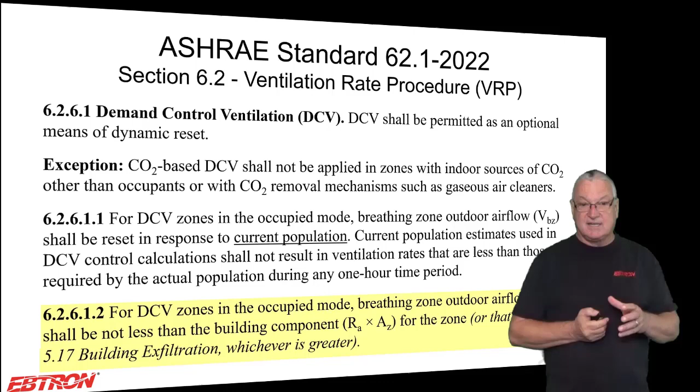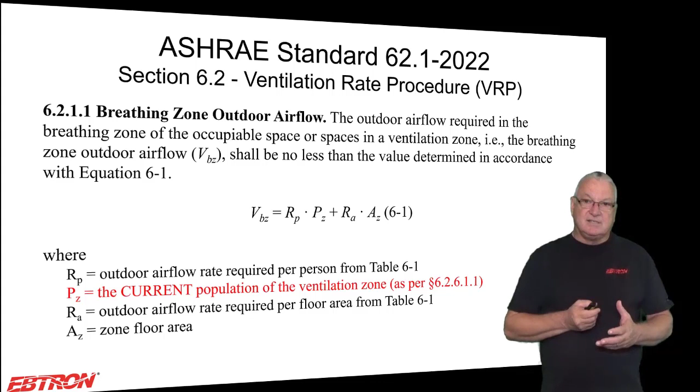The addendum AB maybe changed some of the numbering a little bit here, but it hasn't really changed this concept. So when you take a look at this, if we want to know if we're in compliance, we're going to look at the breathing zone outdoor air. We're not going to do it based on the number of people in the ventilation zone during typical usage - let's take that out. We're going to look at it based on the current population of the ventilation zone, based on the definition that we just went through. So it kind of turns Standard 62 into an operational standard.

So the question is, what in the world does CO2 have to do with this? And what is CO2? How does CO2 relate to indoor air quality? Because I've been doing this for a long time - I've been focusing on CO2 and outdoor airflow rates since the early 1990s. It basically was, for me, I saw two populations of people: those who think it's all about outdoor airflow rates, and another group who think it's all about CO2 levels.

So let's go into this. Why do I maintain CO2 levels? And I think this - like I said, I've been doing this presentation now for almost 30 years, very similarly to what I'm going to do today.

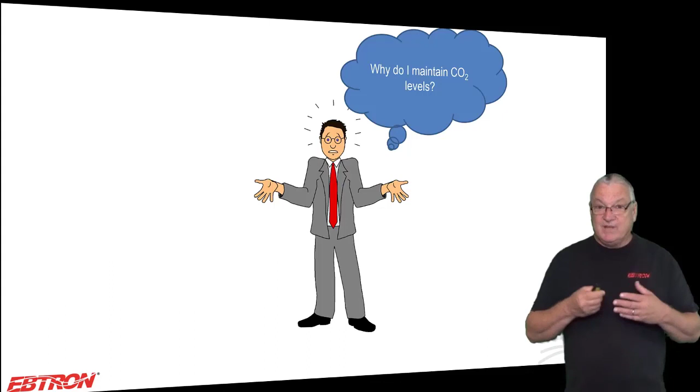I think that over the years, more and more people are getting on board and understanding this, but I still run into way too many people that don't. So I'm going to keep doing this until we get everybody on board, okay? So why am I doing this, okay?

Well, first of all, we're not doing it because it's a contaminant, and we're not doing it because it's a direct measure of indoor air quality. That's one of the first misconceptions that I see.

In fact, if you look at CO2 as a contaminant, OSHA doesn't consider it a contaminant until it exceeds 5,000 parts per million over an 8-hour period, and in shorter periods even higher levels, like 10,000 parts per million over a 1-hour period, is where it becomes a problem. That's not where your buildings are. Your buildings are running anywhere from ambient outdoor CO2 levels of 400 parts per million to maybe on the high level 2,000 to 2,500 parts per million. So it's not a contaminant.

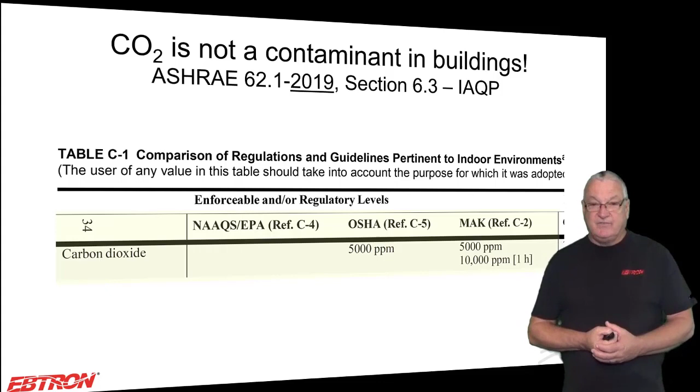So what is it? Why are we doing this? The way that the industry has looked at this, and this is not correct, is they said, let's assume that we're at steady state. Steady state just means that nothing's changing, meaning the outdoor airflow rate coming into the space is not changing, the occupancy is not changing, and their breathing rate is not changing, okay? Their CO2 generation rate is not changing.

And we all know that when we're doing DCV, we're doing it because the population is changing, all right? Nonetheless, this is how the industry has looked at it. If you really want to look at this properly, which we're going to do at the end of this segment, we're going to look at how the rate of change, and the fact that we're not at steady state, really affects how much ventilation we're getting.

Okay, but we're going to do this like the rest of the world looks at it right now. We're going to look at it at steady state, and I've read a lot of papers and seen a lot of things where people have used a steady state assumption improperly, particularly on multi-zone recirculating systems. I'm not going to go into that today.

But when you do a steady state analysis, the volume of the space no longer matters and the rate of change no longer matters. And to make a steady state equation, it's pretty easy: the goes-intos have to equal the goes-outos.

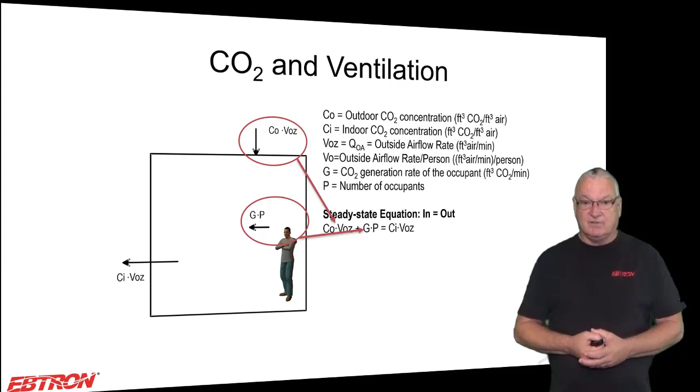Another goes-into, which is dimensionally the same, is G times P. In this case, G is the CO2 generation rate of the occupant in cubic feet of CO2 per minute, and P is the number of occupants. We produce CO2 as a byproduct of respiration. The more of us there are in the room, the more CO2 is going to go into the room. So there are two goes-intos.

Now we only have one goes-out-of, and that's the same amount of outdoor air that has come in, either forced exfiltrated, mechanically relieved, or mechanically exhausted. So VOZ is going to be the same, but now it's going out of that ventilation zone at the new elevated indoor CO2 level, or what you would theoretically measure in the ventilation zone, so CI. So now you have an equation, and we can rearrange it algebraically and still have an equation. One of the things we can rearrange it for is VOZ over P.

Which, in IP units, is outside air CFM per person. So it's like, oh, got it now. I hope you got it now. You're not measuring CO2 because it's a contaminant or a measure of air quality. It's simply a proxy for outdoor air CFM per person entering that ventilation zone, and there is value to that.

As long as we know the CO2 production rate of the occupants, G, and the difference between indoor and outdoor CO2 levels, we can estimate how much outdoor air CFM per person is coming into the space. Graphically, we can say that blue line, which corresponds to the right vertical axis, represents steady state maintaining 1,000 parts per million. For a given population on the horizontal axis, we can estimate how much outdoor air is actually coming into that ventilation zone.

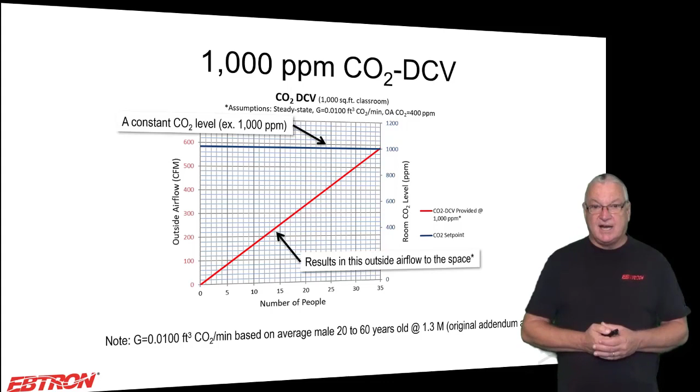That red line is the theoretical outdoor air coming into the ventilation zone, associated with the left vertical axis. I know when you look at these graphs sometimes it's hard to see, but that's why I give you a presentation to look at, or follow along now. These are all based on CO2 production rates of the occupant, and also being at steady state.

Now the first problem we have, which has been a problem since 2004: in 2004, Standard 62 changed the way you calculate ventilation rates from a simple CFM per person to CFM per person plus CFM per square foot. Over the years I've heard people say, I do CO2 DCV because it complies with Standard 62. It really hasn't. Single set point, which is what most people are doing—hey, I keep 1,000 parts per million in a space—single set point DCV does not comply with Standard 62.

It overventilates on the high populations. In this case, I'm using a school classroom, a 1,000 square foot classroom, and it'll overventilate on the high end and underventilate on the low end. Technically, overventilating is in compliance with Standard 62, but I don't believe that was your intent.

I like using this slide quite a bit for those of you that do fixed set points, 1,000 parts per million control—you have some real design problems here. Because unless you're in California operating under Title 24, which is a little different in the ventilation rate required, just about everywhere else in the country is using ASHRAE 62 ventilation rate procedure, or the IAQ procedure ventilation rates, which are even lower.

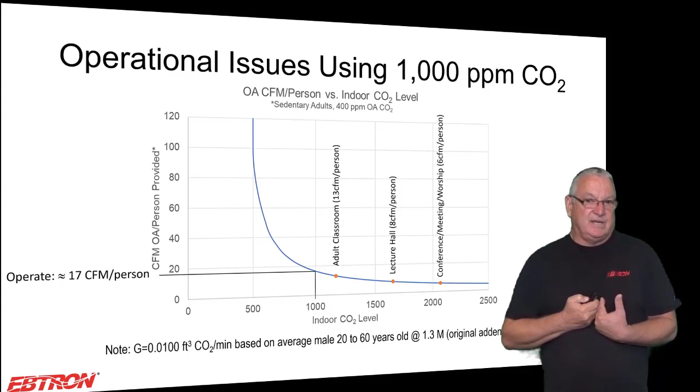I've been talking about this for years. The people that I get in front of and talk to finally understand some of their operational problems. And this is one of the reasons why Standard 62 is trying to make some changes through their addendum AB. I don't think they did a great job, but I think they had to do something, okay? And that's just my opinion about them not doing a great job. I think there's a bunch of errors that I'm going to try to point out a little bit later.

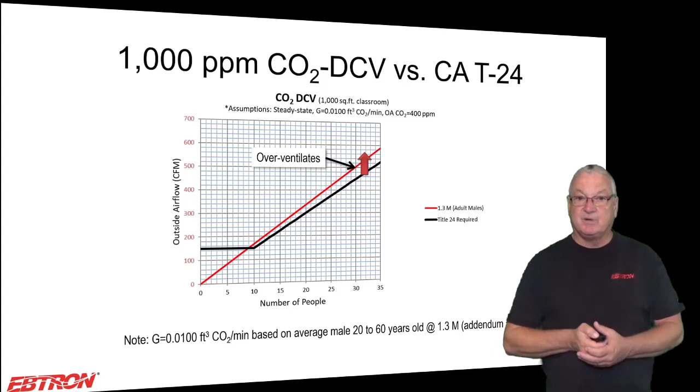Those of you in California, you're a little bit closer because California's 15 CFM per person requirement is closer to the 17 CFM per person. In this case, you're really not in as bad a shape, okay?

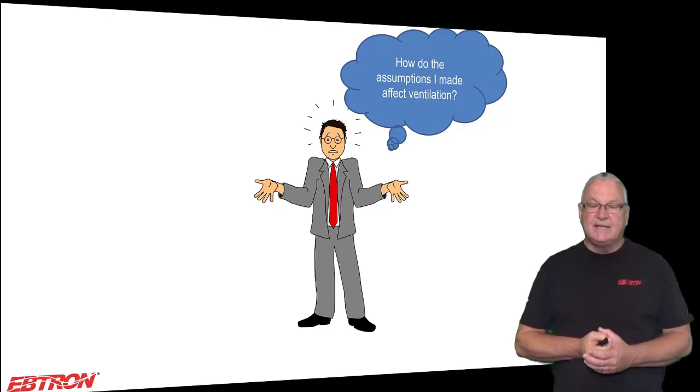The problem now is about assumptions. You've made assumptions, and how do these assumptions affect ventilation? I was really happy about 5 years ago because there was an appendix in Standard 62, Appendix D, and I thought it was misleading, and it got removed, and they came out with this original addendum AB, which said, hey, there's a lot of things that affect the CO2 production rate, which essentially affect how much outdoor air is coming in, and you need to make corrections for it. And the original addendum AB was great.

It was said, hey, make these corrections, determine your set point, and that's how you're going to move forward with this. Well, over the years, the first AB did not get approved, and the second AB didn't get approved either. Finally, this third AB that did get approved really is a really bare bones version of this. But I want to just show you this because you may or may not realize it, okay?

The CO2 production rate of an individual is based on a lot of different things. It's based on their age, their sex - are they male or female - their diet, are they high fat or low fat, their body mass, and their activity level. What I'm doing here is holding all males, same diet, using the average body mass for that age group, and keeping the activity level the same at 1.3 MET. There's folks that say, well, the younger people are more active. You can say that, but I've been in classrooms where the 5-year-olds are napping, so I don't know that I necessarily agree with you.

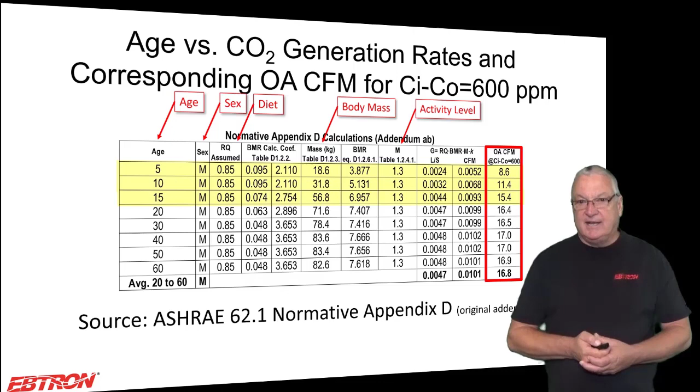The 20 to 60-year-old males, there's not a whole lot of variability here, 16.4 to 17 CFM per person, the average being 16.8. I don't think that's a big deal. But when you look at the 5-year-old, it's 8.6 CFM per person. And then it gets a little bit better. Graphically, I think it's better to look at it this way.

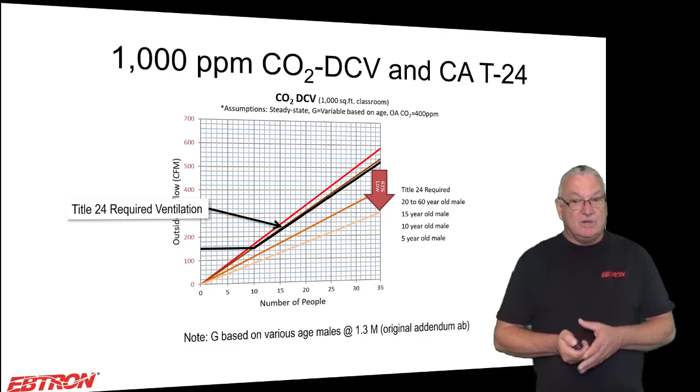So at any rate, you have this problem that has to do with the CO2 production rate just based on age. And actually in California, the Title 24 folks, it's actually worse. The underventilation is worse because your ventilation requirements are actually a little bit higher. So it doesn't matter where you are, this is a problem.

So calisthenics, vigorous effort, 8 MET. You may say, well, I want more outdoor air, but I don't think you wanted this much more outdoor air. Because when you look at this relationship, you find that the MET activity level is directly proportional to the CO2 production rate, which is directly proportional to the outdoor CFM per person. So it's 6 times more.

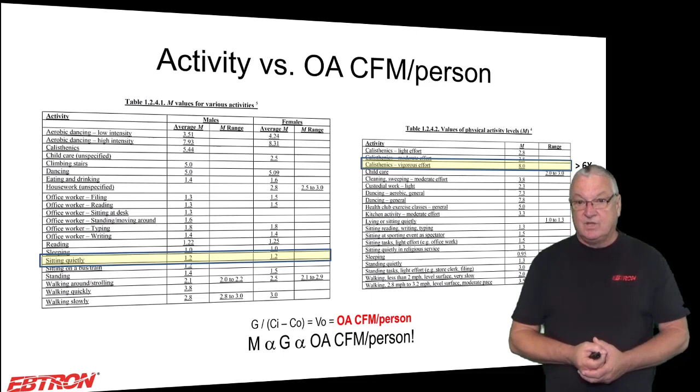And I'm not very good at math anymore because I use my calculator and computer. So I'm going to just say, let's say at 1.2 MET it was 15 CFM per person. At 8 MET, it's basically 6 times that, or 90 CFM per person. You did not design your system for 90 CFM per person.

Sorry. In fact, when you look at activity level and graph it, and I only go to 5 MET here, I used to say to people, you might as well go to Vegas and play one of the games. You have a better chance of winning the game than getting the ventilation right.

And I actually had this graph in a paper with a little different data, but very similar, in a paper I tried to publish in ASHRAE Journal in 2010 or 2011. And they didn't want to publish it because they said I was CO2 bashing, even though it went through peer review and was technically accurate. What do you think about that? Okay, nobody has any agendas in this business.

But anyhow, I would say Dave Dougan, party of one. Yep. Anyhow, that's the way it is, you know. There's a lot of uncertainty here.

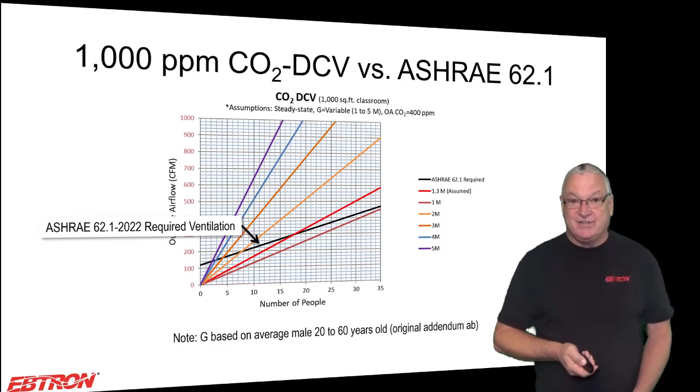Okay, same thing is true with California's Title 24. Then the next thing you got to look at—okay, so I'm isolating uncertainties here. And okay, so now how does CO2 measurement error affect ventilation?

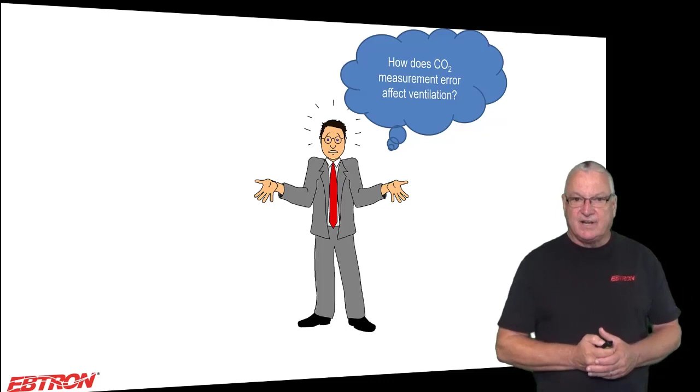Basically, Standard 62 requires that you're within 75 parts per million on the CO2 measurement in the space, and says you can assume 400 parts per million outdoors. Well, I don't have time today to go through all the data, but I have data that shows CO2 levels outdoors anywhere from 350 parts per million to 550 parts per million, depending on the season, depending on what's going on. There could be a thermal inversion. There's a lot of things that affect CO2 levels, time of day in cities based on vehicles. A lot of things affect the outdoor CO2 level.

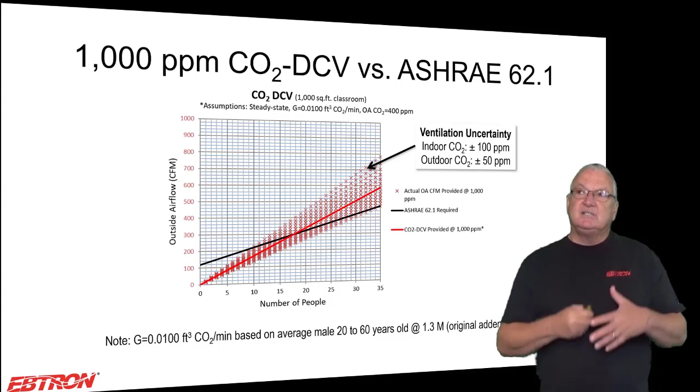Indoor CO2 level—it's not just the measurement error of the sensor, it's the placement of the pickup point. If you come to Ebtron, we have a bring-a-guest room, we call it. It's a 5,000 square foot space. I have 12 CO2 sensors in that space that when they're unoccupied read relatively the same. But operationally, when I put people in that space, those 12 CO2 sensors can read 100 to 200 parts per million different just based on where they're located.

And that has nothing to do with the measurement error of the sensor. So this graph shows the scatter that's basically what happens if you recalculate everything with these errors in your measurement. Where the red line had been your theoretical ideal line, the red scatter is with the 100 part per million uncertainty on the indoor CO2 measurement and 50 part per million outdoor.

And this is if all of your other assumptions are right, meaning that you're at steady state, which you're probably not, and that you actually knew the CO2 production rate of the occupants, which you probably don't. So those are the problems here.

I mean, look at that. The black is what you needed to provide, so that at 35 students, on the far right of that horizontal axis, the black intersecting point is how much outdoor air that you needed to bring in, and the highest point on the scatter is how much outdoor air you may have brought in, or you would be in CO2 alarm, and that's 50% off.

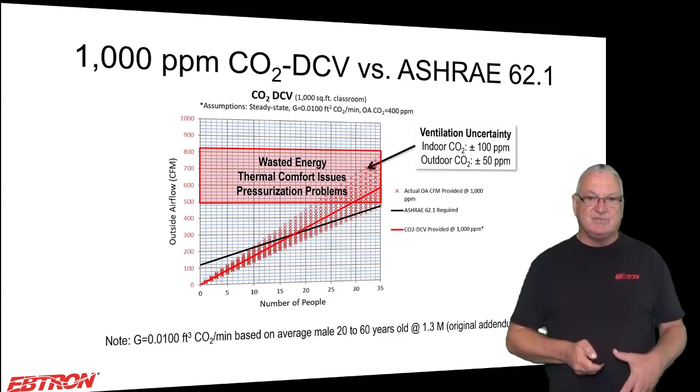Your systems can't handle 50% over ventilation. You might say, oh yeah, that's great, I don't mind the over ventilation. Well, your system can't handle it. It wasn't designed to handle it. So you got wasted energy, thermal comfort issues, pressurization problems, and on the other end you might have IAQ problems or pressurization problems.

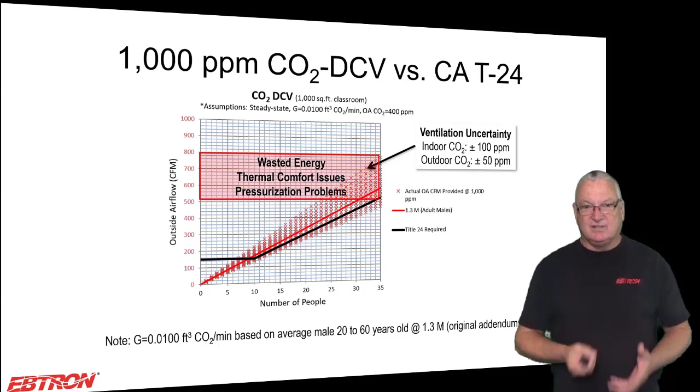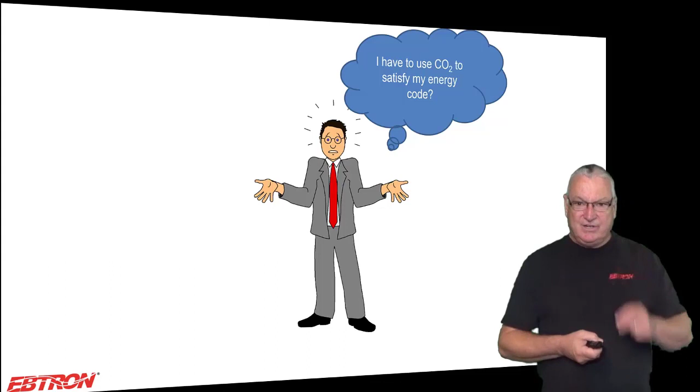So now you say to me, Dave, you've been fighting this for 30 years. I'm not gonna fight this. I have to do this. I have to use CO2. So what are we gonna do here?

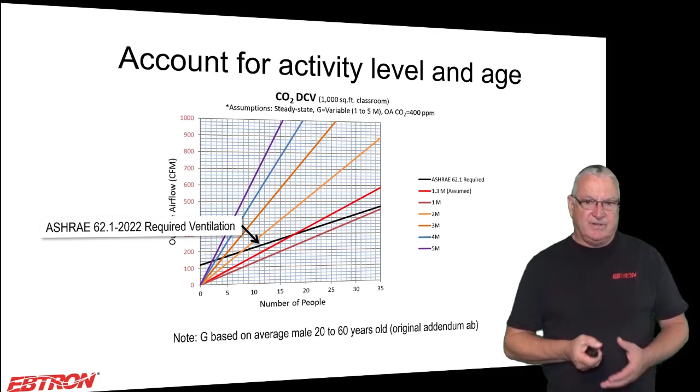The question should be, can I improve it? And the answer is yes, we can improve it. The first thing you need to do is account for activity level and age, and then you need to set some limits. Now, how do you set limits?

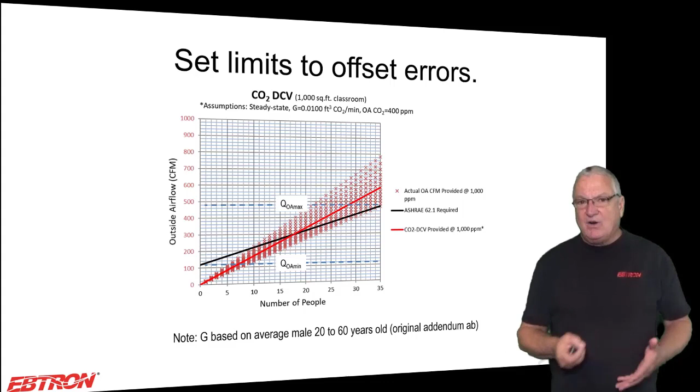Most people set limits with fixed dampers, but we can demonstrate that fixed dampers have problems, whether they're on recirculating air handling units or you're doing DOAS with zone level measurement. You can't rely on a fixed damper position. On recirculating units, basically we have wind pressure and stack pressure that we have to deal with.

We have hysteresis, binding, deterioration of the damper. Those are problems. And then we don't have the wind and stack pressure problem when we talk about DOAS,

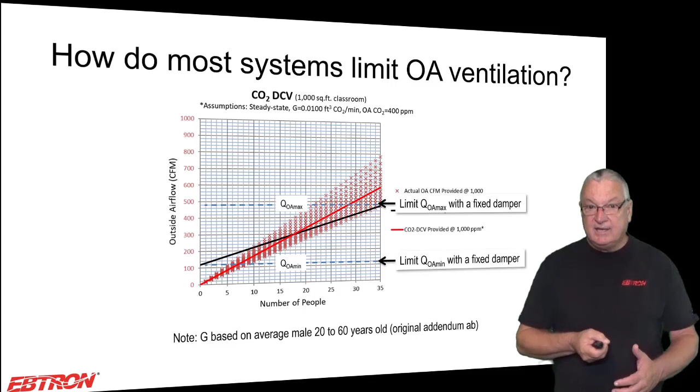but on DOAS, we have different ventilation zones that are changing their ventilation requirements so that a given damper position will result in variability in airflow. So you just can't set fixed damper positions.

So I show all this uncertainty on the damper, it's useless. And I'm not even showing you, like on a rooftop unit or something like that, the fact that there's additional error because test and balance can't even get out there and get a good measurement. And then on top of it, you have this either changing fan speeds or changing damper positions on DOAS.

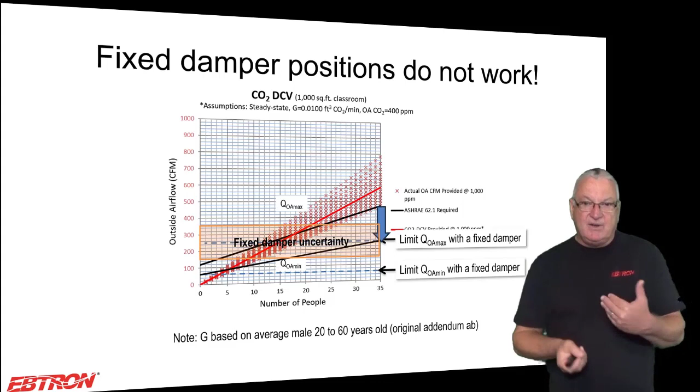So fixed dampers don't work. It's a moving target. You cannot rely on fixed dampers. The way you need to do this is you need to do flow measurement. On recirculating units, it's in the outdoor air intake, and on DOAS, it's at the ventilation zone.

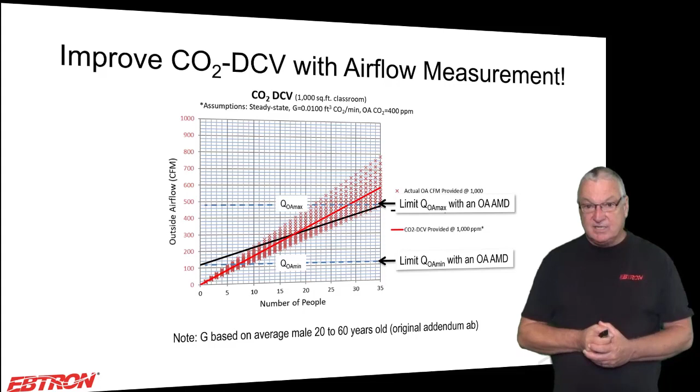A very common way that people would do this is they would do a deadband control where they would set a min-min and a min-max, and they would control at the min-min or the min-max, depending on what the CO2 level in the space is. And if you're doing it with airflow measurement, it's a big improvement. Now, I am going to show you some of the real-time lag problems, but it's a major improvement, and that's what you should really do.

The preferred way that we've had to do it for years, that I think in reality Standard 62.1 AB is finally saying to do, even though they don't explicitly say it. This is what they're saying.

You measure the CO2 level in the space, and you look at your CO2 set point that you're trying to get to or not exceed, and it goes into a control loop or reset loop, and you output a new airflow set point. Then you compare that airflow set point to your min and your max. If it's below your min, you set it to the min. If it's above the max, you set it to the max. If it's anywhere in between, it's anywhere in between.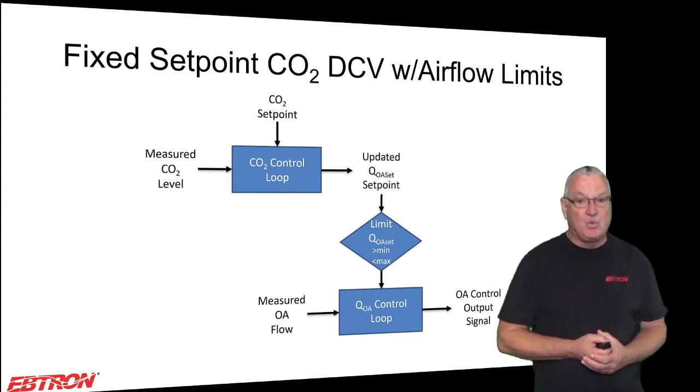And that airflow set point then goes into your outside air control loop, which could be as simple as modulating a damper or a more complex sequence that's required on some air handling units.

And you end up with this within the limits of the airflow measurement error, okay? So this is a significant improvement.

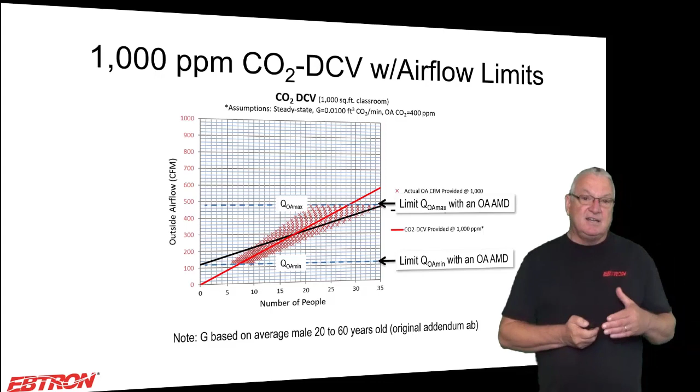And that just brings me to this addendum AB, which, like I said, it's just recently approved. Probably most of you don't even know it's been approved, okay? So a couple things that I want to state about what they're telling you to do now, which is an improvement, but there's some problems that I'm going to explain to you, particularly when we go into actual operating, meaning we're not at steady state, okay?

But at any rate, they say DCV controls to maintain the zone ventilation rate no less than the building component when zone CO2 concentration is at its ambient or low outdoor level, basically. Upon a rise in measured CO2 levels, ventilation shall be increased proportionally. So it's a proportional reset. It's not the perfect way to do it, but it is a better way than that deadband control that I showed you previously, okay?

This statement here is not correct. Because CO2 and ventilation are codependent, this will rarely, if ever, happen. And I am concerned about the language on this. It says, when the zone CO2 concentration is equal to the maximum CO2 concentration, the minimum zone ventilation rate shall be equal to its design ventilation rate. That is not necessarily going to happen. And I'm going to show you that in a few examples.

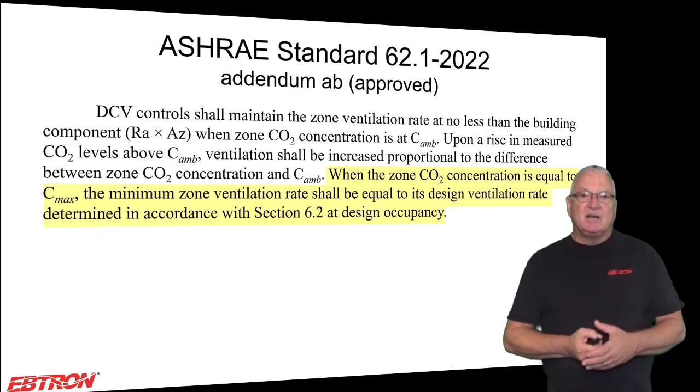Okay, but anyhow, Addendum AB is an improvement, okay? One of the problems I've had getting people to do the method we've wanted to do is that you'll end up with a CO2 level in the space that varies. People weren't ready to do that. Well, now if you follow Addendum AB, that's exactly what will happen. CO2 level in the space will vary.

There's a couple other things that I think are noteworthy here, and it kind of helps with this one problem I'm talking about. Zone and system ventilation rates are not required to be larger than the design ventilation rate required by Section 6.2 at design occupancy, regardless of CO2 concentration. I think the intent here was they knew there's going to be measurement error, but it's also because of this codependence problem, okay?

So you have an airflow measurement device in either your outdoor air intake or at the ventilation zone on DOAS, and then you can basically say, hey, the CO2 level is higher than my set point, but you know what? I can show that I'm at the design maximum. That's great. And I was glad to see this note because I think this was very important.

The CO2 values in Table 6.1, which I'm not showing you, unfortunately give you CO2 default levels which are rarely, if ever, going to be what the correct CO2 level needs to be on a lot of these spaces, okay? And unfortunately, not everybody's going to understand that. They're just going to look at these CO2 levels and set them, okay? The other problem is they allow CO2 to be used on low occupant density spaces, which I'm going to show you is a very, very, very bad idea, okay?

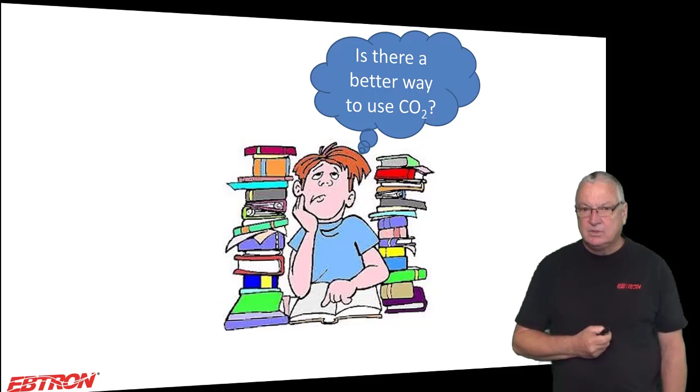So then the next thing comes up: is there a better way to use CO2? Okay, and I think there really is. And this is really how I had wished that Addendum AB would have been written in terms of how you do the control.

Because, you know, Standard 62 rarely tells you how to do something. They don't tell you to measure outdoor airflow rates and control them, but for some reason they're telling you how to do the CO2 DCV, and they're not even telling you necessarily the correct way to do it.

Okay, but when you take a look at the steady state equation, if you're going back and making the assumption of steady state, which again is what everybody's doing, which is wrong, okay, and you are measuring the outdoor airflow rate either at the air handler or to the ventilation zone in DOAS, you actually have one more piece of this pie, and when you have that one more piece, you can estimate the population.

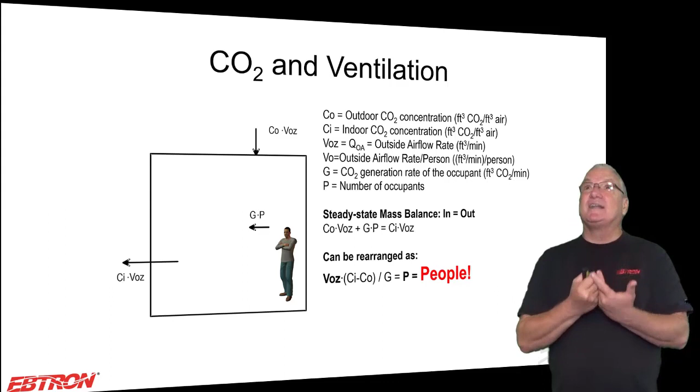And again, we've been saying this. I've been trying to tell people to do this for 15 years. I don't know why nobody listens.

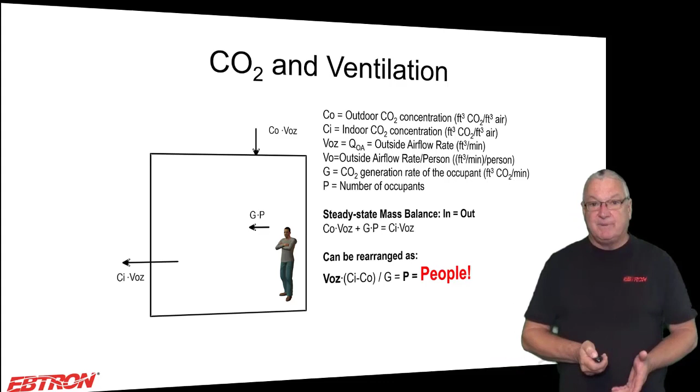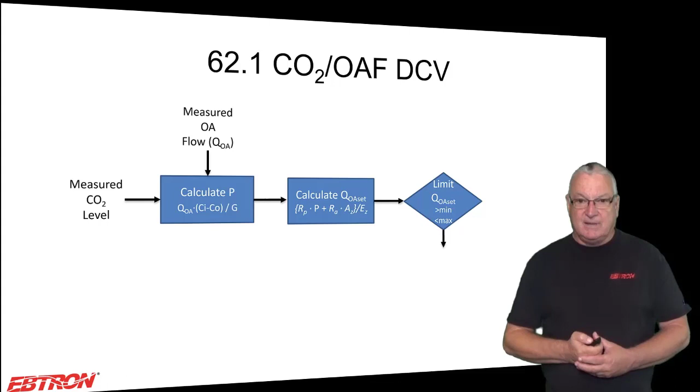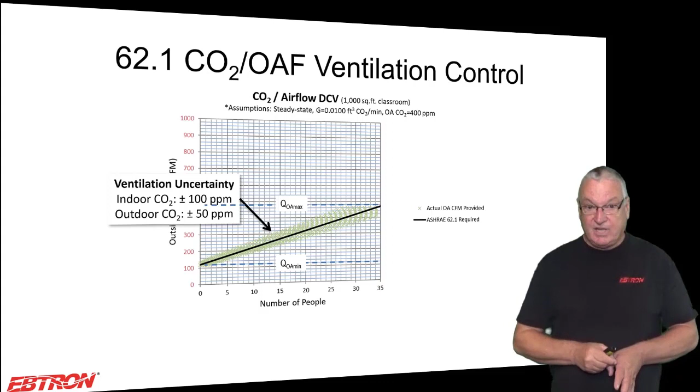Basically, if you know the CO2 level and the outdoor airflow rate going into the ventilation zone, you can estimate the population. You measure the CO2, you measure the outside air, you calculate the population. It's very easy to implement on single zone, or on DOAS. You calculate the required outdoor air for that zone, establish the limits: if it's less than min, set to min; greater than max, set to max; in between, it's in between. It goes into your outside air control loop. That results in this, which for those of you working under Standard 62, or the VRP, is a really good way to do it.

All right, I'm going to step out for a second here. I'll be right back. I want to look at the steady state assumption errors. I've got some examples. I'll be literally right back.

Okay, I told you that would be fast. So now we're going to take a look at some examples, and they're going to be a little tricky to look at. Some of this is material I've just put together recently based on some old material I had, and it's not best suited for a presentation of this type. If you want to take a look at the individual slides, from the file that we sent you, I think it'll be better. But just follow along with me.

The fact of the matter is we're not at steady state, and we have to take a look at what that really means in terms of the ventilation we're providing. So what I've got here is a couple examples -- I have lots of examples. We're going to look at a classroom example and an office example. In the classroom example, we're going to look at two populations: the design population and a lower population. For the office, we're going to look at the design population.

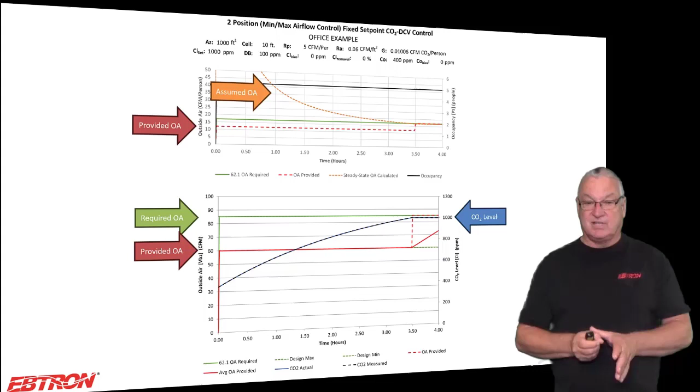So now offices, that's something that really bothers me, because in the addendum AB put in a 1,000 part per million set point for an office space. You have a low population density, okay? It takes a long time to get to steady state, okay? So in this case here, this is at the design population, which was 5 people per 1,000 square feet, and we were at 5 people per 1,000 square feet. So this is like the best case, okay? And we're using this to control ventilation in office space.

We underventilated for 3.5 hours, and we significantly underventilated. Okay, if you look at the provided versus the required on the lower graph, we significantly underventilated. Okay, and again, that's a problem.

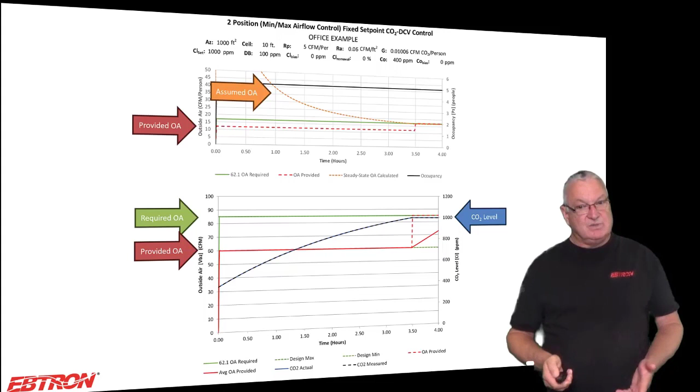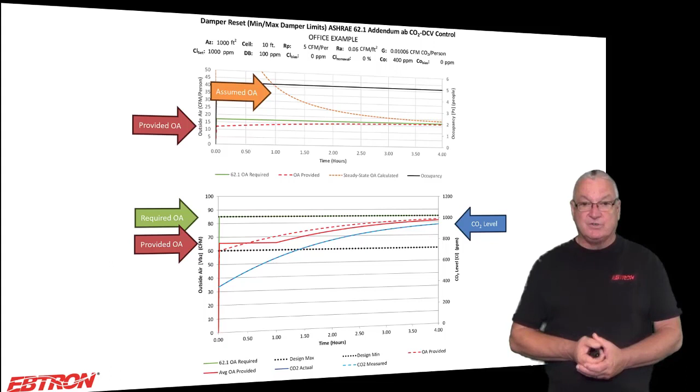Now this is with the deadband control, okay? But it's not really any better with the addendum AB recommendation of just a proportional reset, and it's not really any better with the version that we like, which is estimating the population. The reason for this is we're not really at steady state. It takes a long time to get it to steady state when you have a few people in the space. I don't understand why folks don't seem to understand that, okay?

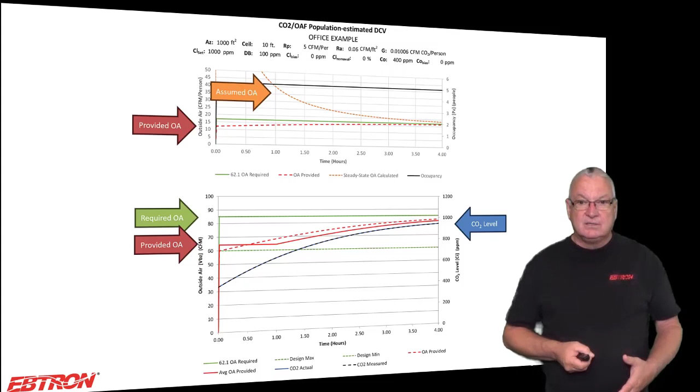And yet again, if you go to the top there, and you didn't understand this relationship, and you just simply went by the CO2 levels, you'd say, ooh, look at all this outside air I'm bringing in per person. It's not real. That's not what you're really bringing in, okay? So these are serious problems.

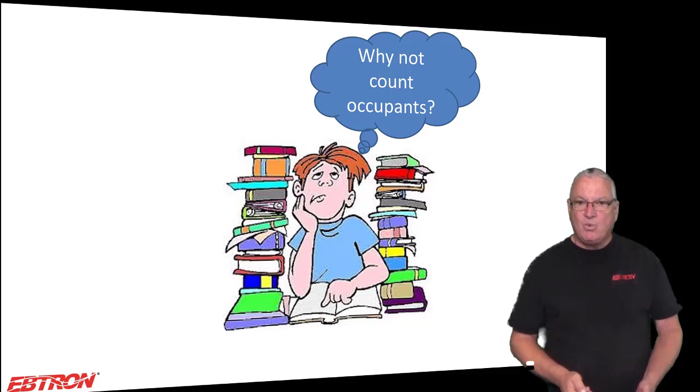It always brings me to this. It's like, there's gotta be some agenda here, okay? Because the standard clearly says, provide the breathing zone outdoor air for the population. But yet there's no research, no significant support for counting the occupants. Why? If you counted the occupants and you measured and controlled the outdoor airflow, whether it be on a recirculating system or a DOAS system, you'd be done, okay? Why is there no support for this, okay?

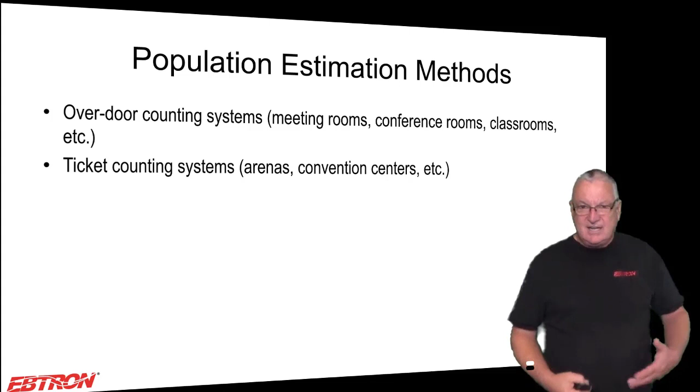I mean, you say, oh, you can't measure it. Of course you can. There's plenty of counting systems today. COVID actually improved that. There's a lot of good counting systems. We even make a counting system, okay? There's ticket counting systems, arenas, convention centers. They know how many people are in these spaces. I used to say casinos were the only ones who could use video imaging counting systems because they were expensive, but they've actually come down in price.

Point of sale, why a movie theater? Like, why is a movie theater controlling the CO2 when they have a point of sale system that tells you how many people are in each space? It's the ideal way to do it. You know when a movie starts, you know when a movie ends. It could be any kind of theater, but you know when it starts, you know when it ends. It even works out well for multi-zone. Why are we not, multi-zone recirculating, why are we not supporting this? There's gotta be a reason, okay?

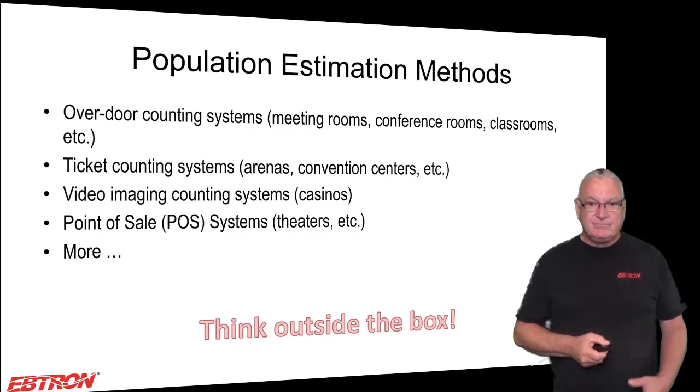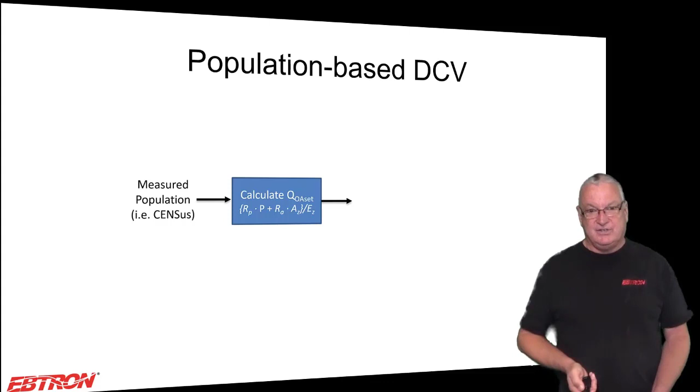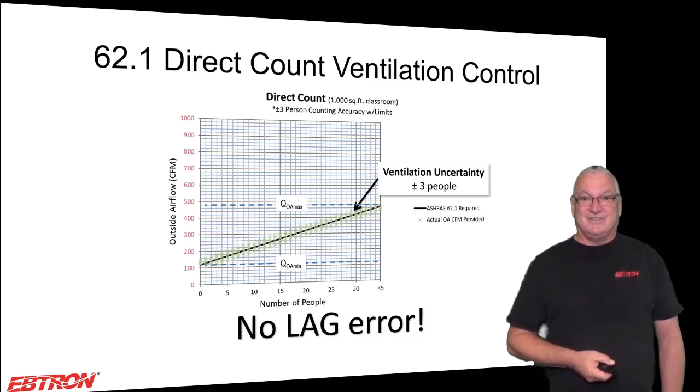Yeah, a couple good things though. Also, in addendum, maybe I did want to point this out at least, maybe we can get people to do things better. I skipped this when I showed this slide previously. Other DCV control logic shall be permitted to be used where it can be demonstrated to comply with section 62611 under all expected operating conditions. Yeah, that's provide the breathing zone outdoor air for the population. So yeah, you can do this and meet the requirements of the standard.